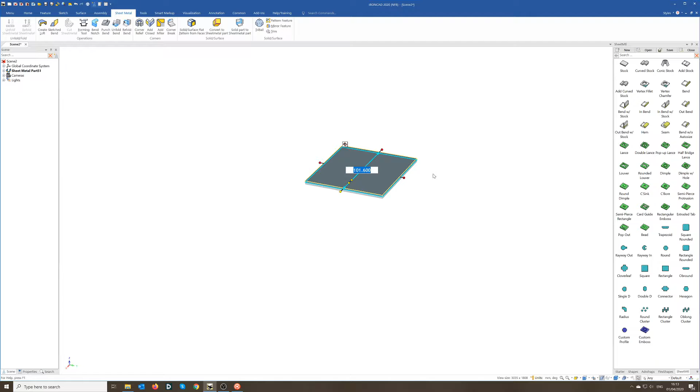So the first thing I do is drop in a stock, and the stock is 500 by 250 as we agreed yesterday. The first thing you'll notice is it's a thicker piece of stock. I've set the default stock now to be 2mm, which is normally what I'd imagine people would use.

But obviously you can change the stock parameters by just clicking on the part, going to part properties, then selecting a new stock and choosing whichever one you want to utilize.

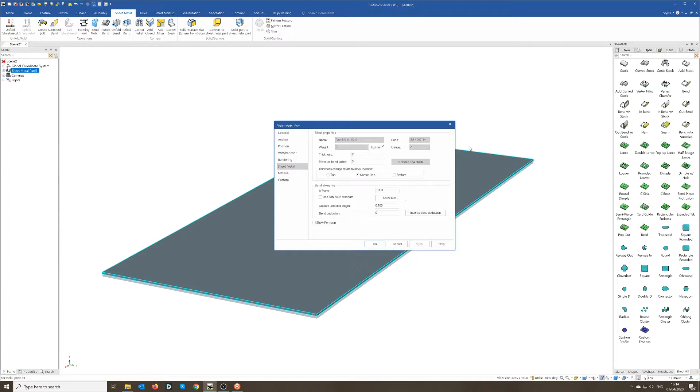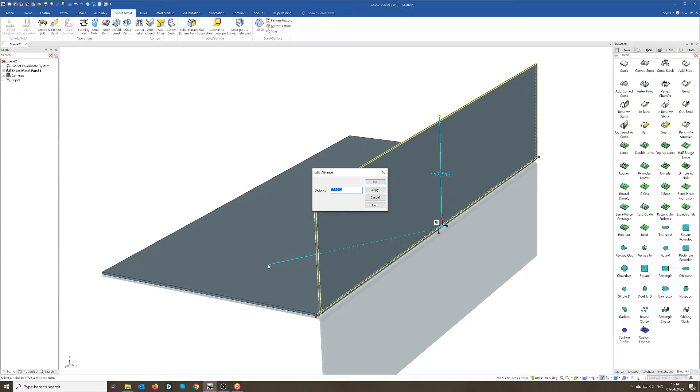Now last time I created the edges all the way around. You don't need to do that - there's a much easier and quicker way I realized after our conversation. First I'll drop a bend on that point, and I can pull it to any direction and distance, or more to the point, snap edit the distance from that point and make it 110.

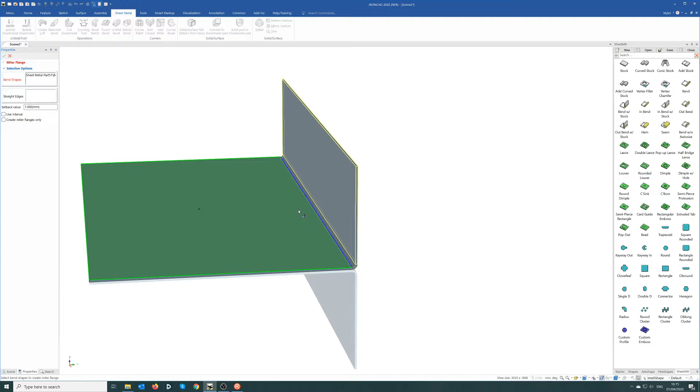And there's one side - well, what about the other side you may ask? That's very simple, we just use the add mitre. You click on that and it will ask you for the bend shape. If you've got a lid on, you can have multiple bend shapes. Then it asks for the edges - you choose the edges you're going to use, say done, and it makes that box already for you. That's pretty good.

So we got that in a fraction of the time we were doing yesterday. Now you said you wanted to put that as a slope, with 50mm at the front right up to the edge there. That's quite easy to do.

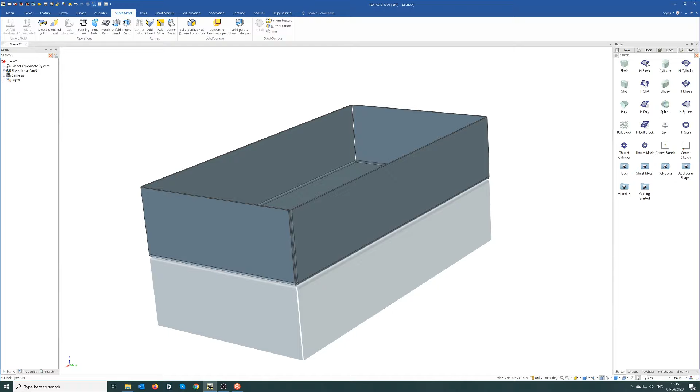We go back to the starter and drop in an H block in the middle there, which gives us the ability to cut something out. I'm going to move this out so I can go further, cut through the block. I do the same thing on this one - I'll pick that one there. No, I don't need to do that actually, because I just need to go through.

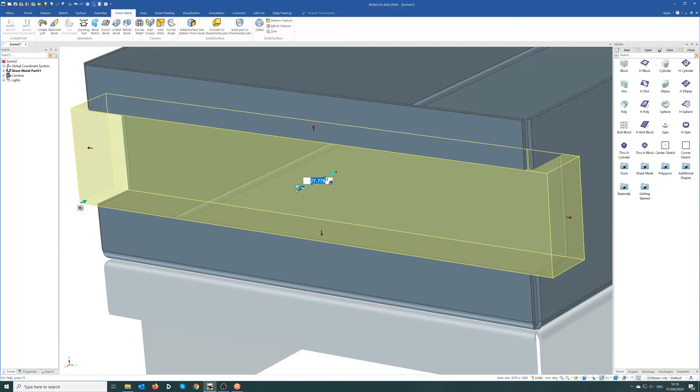So I turn that off and go all the way through there, and I also need to go all the way up the top there. That's obviously in the wrong position and the wrong angle - it's very simple to fix.

We use the tri-ball again, as I've shown you. I need to move the tri-ball, so I unlock it, fix it so it only moves in that axis, and go down to that edge there. Okay, relock the tri-ball.

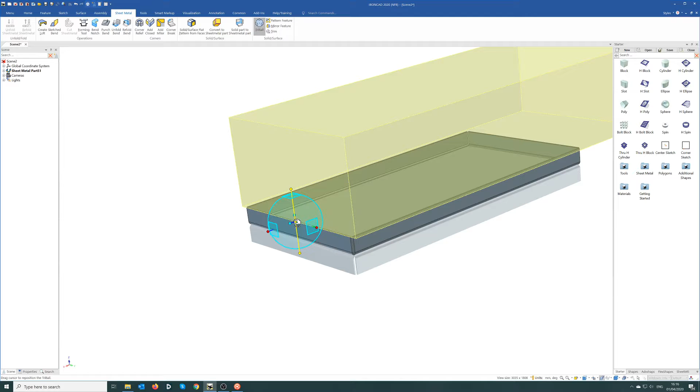Now I need to move that point, distance from point, and rotate it around, pick that point there, and say 50. So I've gone 50 up, and now I want to rotate it about that axis on the front there. I click that point like that, and you can see I need to go onto that edge there - that's easy to do.

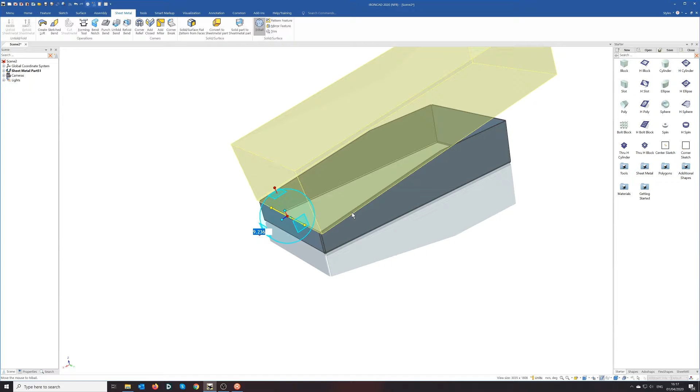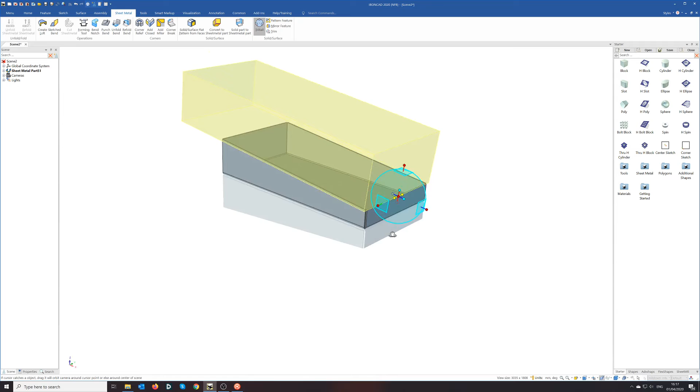If I rotate this round this way, it puts the orientation bars into the geometry you're using. All I need to do is pick that point there, go to point, choose that point, and you can see it's got the right angle, with the edges in. Turn off the tri-ball, move it out slightly to make sure I've cut all the way through the box. Click OK, and there you can see I've made the box very, very quickly.

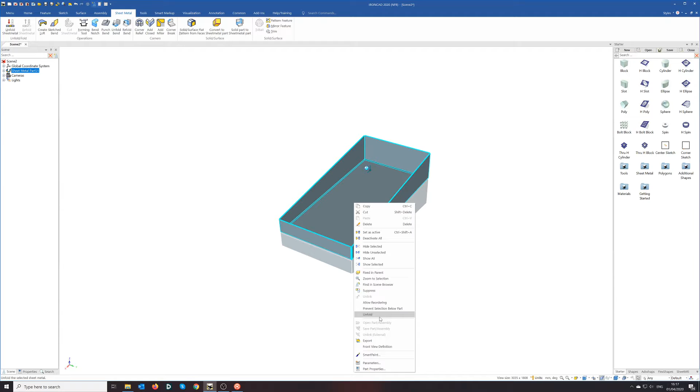Now if you select the part and right click, you can say unfold, and it will unfold that part and give you the bend lines as well. Because we used the mitre facility, it gives some notches in there so you don't get any stresses and tears when you're bending the part up.

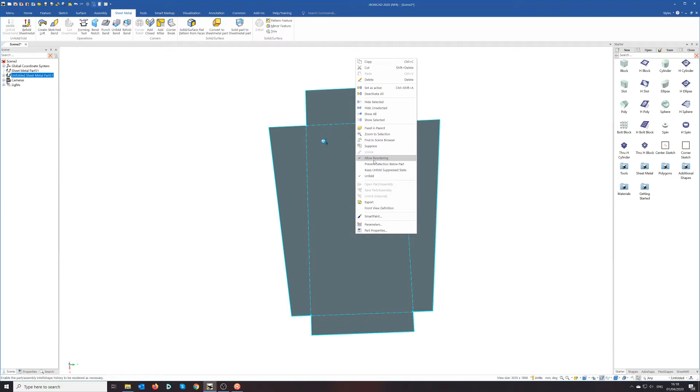So then you want to fold it back again, because what I wanted to do was show you the best way to put a stiffener bracket on there. It's much easier - I should have realised at the time. It wasn't until you mentioned it that I realised I could easily do that.

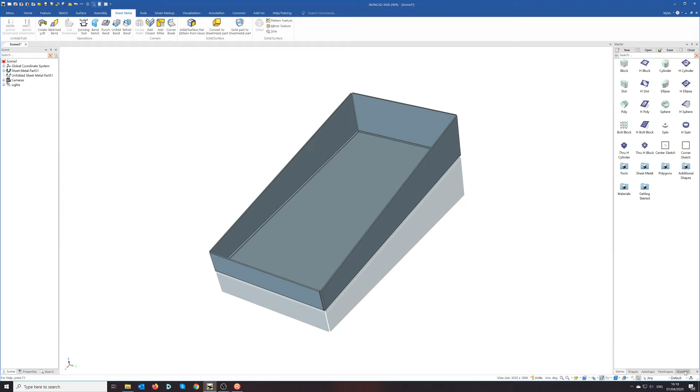So if I go to the sheet metal and I drop in a curved stock, drop it into the center point there, okay. For some strange reason it didn't pick that, let me just go there, I can edit the cross section.

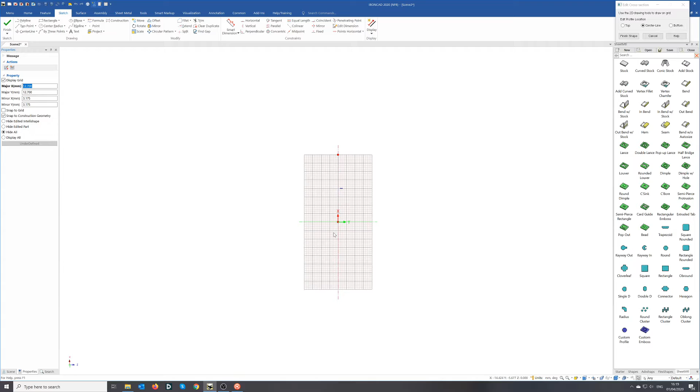If I edit the cross section, I can then zoom in here, and what I shall do is add a polyline. I'm just going to make a top hat section, so I'm going to go from the center of there to there, to there, to there, and there. Escape then brings you out of the command.

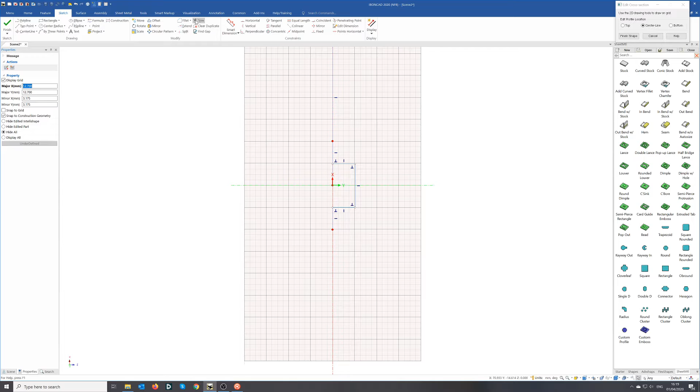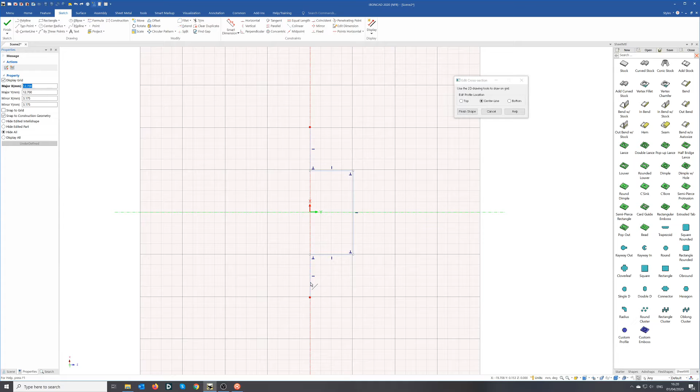I'll just stick with the center line at the moment. And we can now zoom in on this, and we can then choose sizes as well. If we click on this, it will tell you - oops, let me undo that, sorry, because I had the trim on there. If I click on the line, I can see it's 180 degrees.

If I double click on that point there, I can see that I need to make that say 15. Okay, and if I pick on this point here, let me just double click on that line.

Now I want to make that 15 as well. Let me undo that because I should have picked that end, and then 15. There we go. The end you pick is the end you want to move, so you just bear that in mind.

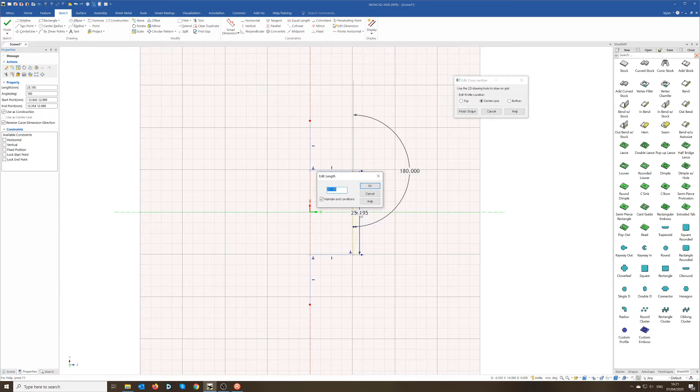And this, I would like that to be 25. I'm not too worried about it being on the center line there, because you're going to move it around when you place it on the ramp.

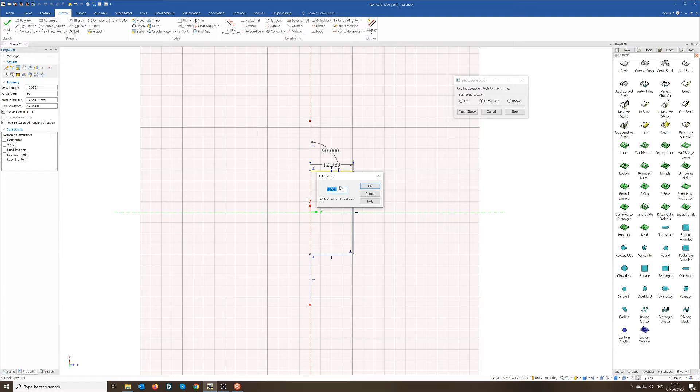And what length there? We'll have that as 15 as well, shall we? So I want to pick that in there, I want to move that end, I'll make that 15. There we go. And there you see it's moved it into the approximate shape, so we're going from there like this.

However, what we do need to do is - you don't have square parts on there, so when you're bending sheet metal, you need curves. So I'm just going to go to the fillet section.

Now I can grab that and move it in, pull it in, and it will move to that position. But a more accurate way to do it is to select the node, right mouse click and pull in, and then it gives you a value which you can put in.

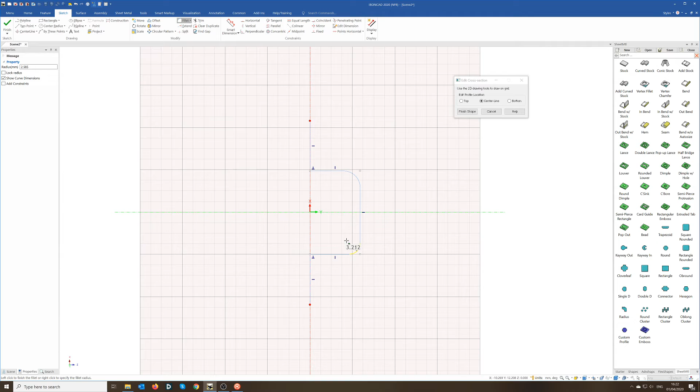So I'm going to say that's 5, and that's 5, and that's 5, and that's 5. And once you say that, you can say finish shape, and it will then add that shape onto the part which you've placed the curved stock.

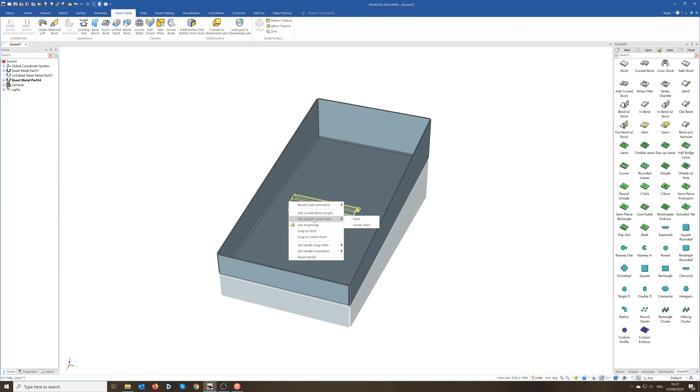Now I can move this to wherever I want, whatever length I want, but realistically you want to be more accurate, because you want to make it look neat underneath. So I pick that point, I'm going to say make that 10 millimeters from that edge, and rotate it round, 10 millimeters from that edge.

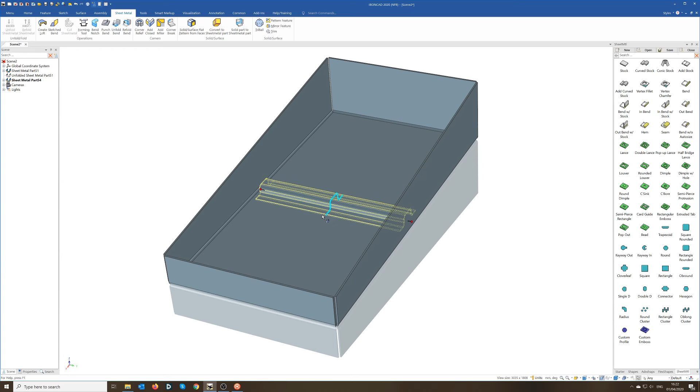And there's one more thing to do - because I've got thicker stock here, if I use the triball I want to move it in that direction. I just want to move it up a bit, and this time I want to unlock it. I just move that down to that point there, and then just move the triball and put it onto that face there. So there you see I've created that part.

Now you can also individually pick the sheet metal. You can also, by right clicking on that, say unfold - it will hide everything else and give you your bend lines as well. If you then refold it again, it will bring everything back.

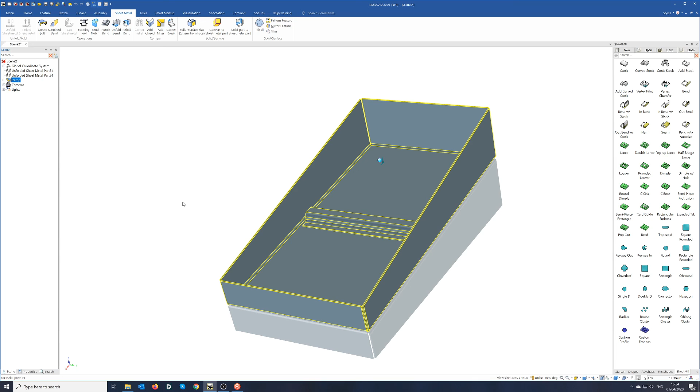You can then save this as an assembly, so you can select everything like this across here and roll that up into an assembly. So you can call this ramp if you so wish, by clicking on the part there and saying ramp, and then you can save that and go into the drafting module, which I've shown you about last time.

I hope you found this useful, and I will find out about the checker plate and displaying it. I think it's a bitmap image that's laid over the top, but if you've got any more questions, don't hesitate to contact me and I'll send you another video.